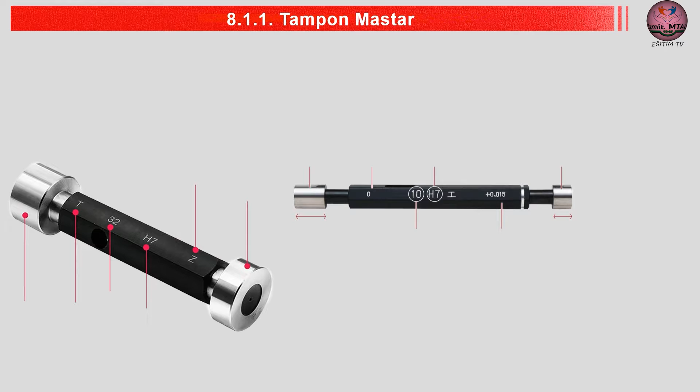Tampon Mastar. Bu mastarlarla deliklerin imalat teknik resminde verilen toleranslar içerisinde yapılıp yapılmadığı kontrol edilir. Çeşitli çap ve boylarda ihtiyaç duyulan ve uluslararası standartlarla belirlenmiş olan ölçü aralığında yapılırlar. Mastarın bir tarafı geçer, diğer tarafı ise geçmez ölçüdedir.

Çap, geçer. Tolerans, geçer yüzey. Geçmez yüzey. Geçer, kalın, geçer tolerans. Tolerans, çap, geçmez tolerans, geçmez, ince.

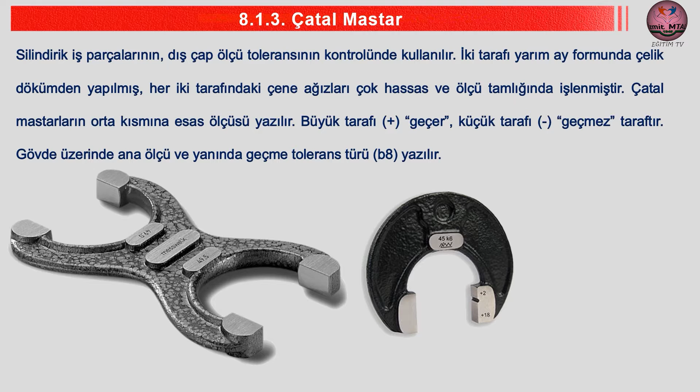Çatal Mastar. Silindirik iş parçalarının dış çap ölçü toleransının kontrolünde kullanılır. İki tarafı yarım ay formunda çelik dökümden yapılmış, her iki tarafındaki çene ağızları çok hassas ve ölçü tamlığında işlenmiştir. Çatal mastarların orta kısmına esas ölçüsü yazılır. Büyük tarafı geçer, küçük tarafı geçmez taraftır. Gövde üzerinde ana ölçü ve yanında geçme tolerans türü yazılır.

Johnson, Blok, Mastarı. Dikdörtgen prizma biçiminde, çeşitli ölçü ve tamlık derecelerinde üretilmiş, yüzeyleri sertleştirilmiş ve hassas şekilde işlenmiş çelik parçalardan oluşan mastarlardır. Mastarların karşılıklı iki yüzeyi çok hassas olması nedeniyle, istenilen toplam ölçüyü meydana getirmek için birleştirildiklerinde, yüzeyler arasına hava girmediğinden mastarlar birbirine yapışabilmektedir.

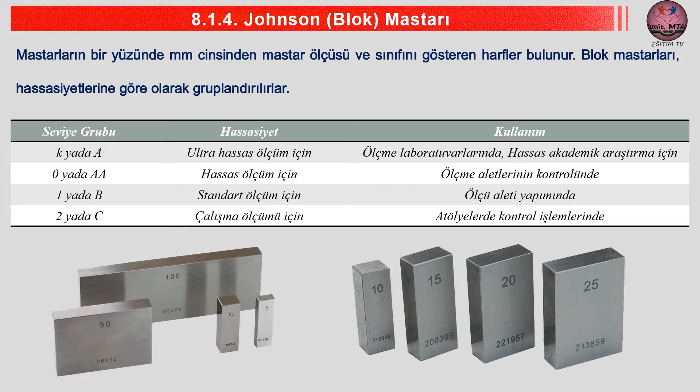Mastarların bir yüzünde milimetre cinsinden mastar ölçüsü ve sınıfını gösteren harfler bulunur. Blok mastarları, hassasiyetlerine göre gruplandırılırlar. Kullanılan blok mastarların yüzey aşınması nedeniyle zaman içerisinde hassasiyetlerinde azalma olur. Bu nedenle hassasiyeti azalan mastarlar bir alt gruba alınarak kullanılabilir.

Mastar takımları parça sayısına göre değişir. Takımlar genellikle 18, 32, 47, 56, 76, 87, 103, 111 ve 128 parçalı olarak imal edilir. En küçük mastar ölçüsü 1,005 mm, en büyük ölçüsü ise 100 mm'dir. İstenilen ölçü mastarlar birbirine eklenerek elde edilir.

Precision starts here. Repeatable, accurate, traceable precision. Of the hundreds of inspection tools available to us, gauge blocks are special. Now, they don't appear to do much. They just sit there with no electronics, no gears, no moving parts at all.

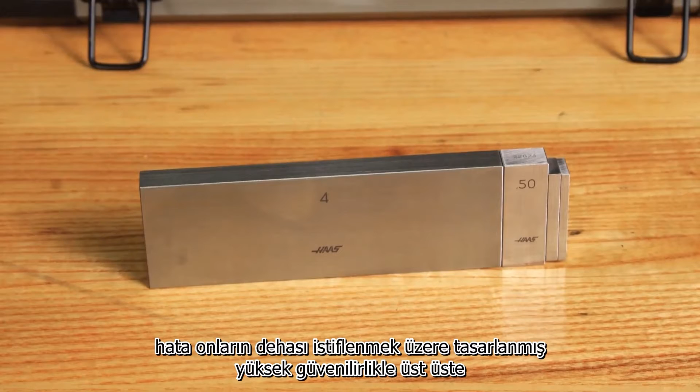But this isn't a fault, it's their genius. Designed to be stacked one on top of another with high reliability and precision, they're the final say in accuracy when used to measure our parts or calibrate other inspection tools.

Pick a number, any number, and we can create a stack of gauge blocks to that height in increments of just 1 micron for our metric sets, or 1/10 of a thou for our inch sets. Placed on a granite surface plate, our gauge blocks can be used as a reference to measure the height of a part or feature with incredible precision.

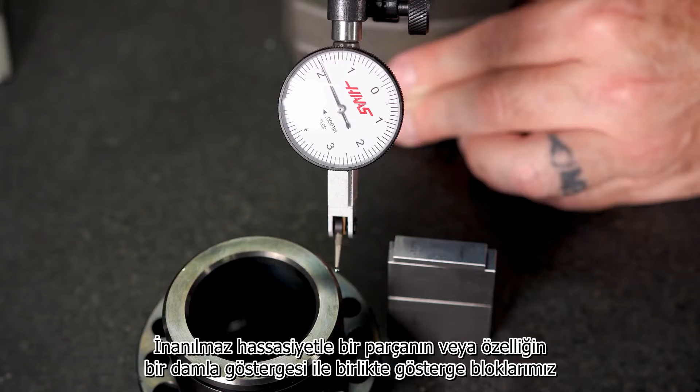Combined with a drop gauge, our gauge blocks can provide the absolute reference values that we need. Now, we will use gauge blocks along with a little trigonometry to produce perfect angles using sine bars or sine plates. With the right accessories, they can be used to create precision gauges for inside diameters, ID features as well, saving us the cost and lead times of custom ring gauges for every job.

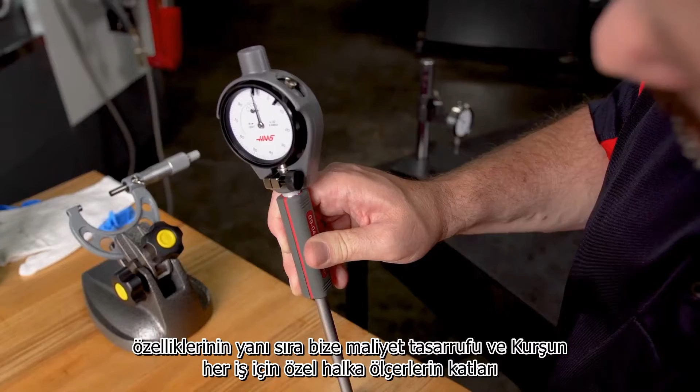Gauge blocks provide that second opinion, the final verdict, when it comes time to verify all of our other adjustable measurement tools. And if you are new to machining, they can be a terrific tool to hone your measurement skills, making sure that we aren't pushing too hard or too lightly with our other hand measurement tools, like calipers.

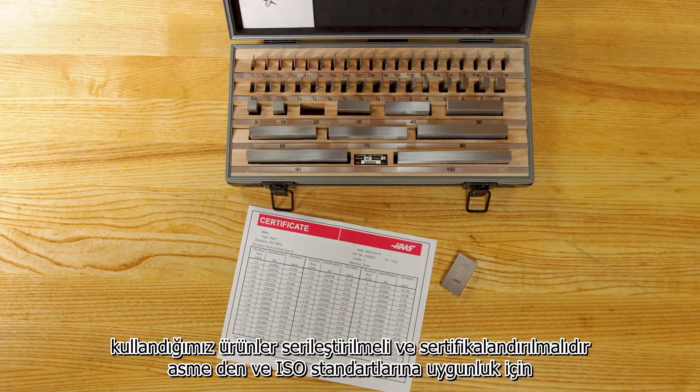A good set of gauge blocks is what connects your shop to the rest of the world, making sure that 1 inch in California is the same as 1 inch in Ohio, making sure that we're all traceable back to the same outside sources. The gauge blocks that we use should be serialized and certified for accuracy to the ASME, DIN, and ISO standards.

Building a stack of blocks is just one of those essential skills that every machinist is expected to master. Now, with a target height in mind, we will start by finding the block that can provide us with our correct least significant digit, our smallest value, that far right decimal value in our height. From there, we will work our way up in size from small to large, right to left, until we've created our desired height stack-up.

We would follow this same roadmap if assembling a stack of metric blocks. Now, we don't just stack our blocks together, we actually wring them together, like wringing our hands. This creates a strong bond that holds them firmly in place. This is an amazing property of physics that is worth looking up sometime.

Now these blocks stick together perfectly, just as expected. But if two blocks don't stick to each other, they might be dirty or damaged. It's that bond between the blocks that let us know that they are clean, flat, and accurate. The mere act of wringing blocks together is kind of an in-process inspection, letting us know that everything is okay.

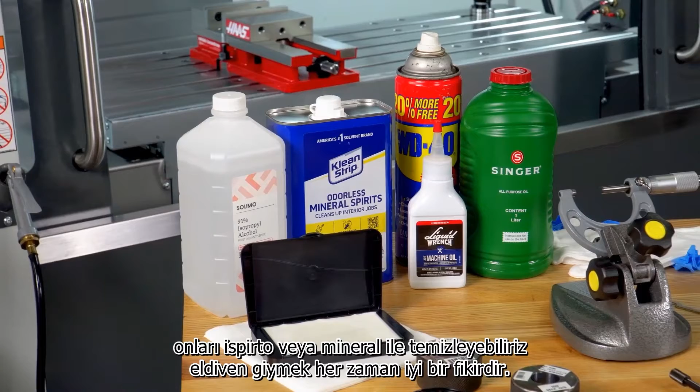If dirty, we can clean them with rubbing alcohol or mineral spirits. It's always a good idea to wear gloves of some sort when handling expensive gauge blocks, but to be honest, I don't often wear them. I'm just too busy measuring parts. But I do take very good care of my gauge blocks, and I've never had a problem because every time I'm done using gauge blocks, I wipe them down, cover them with a light oil, wipe that oil off, and place them back in their protective boxes after each use.

While we need to respect our gauge blocks, they're not fragile. They've been hardened to 63 Rockwell or better, so you're not going to wear them out by cleaning them. Not something you have to worry about.

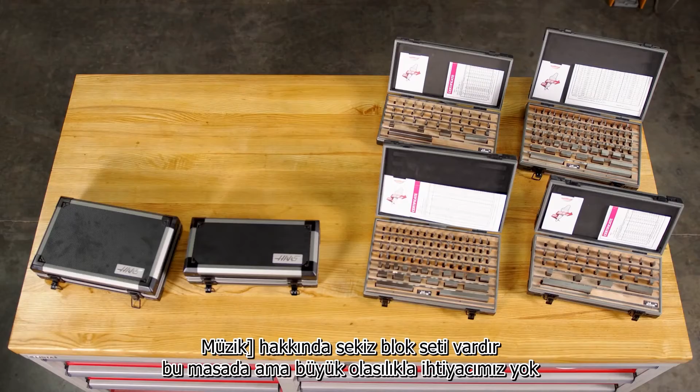There are 8 sets of blocks on this table, but we most likely don't need 8 sets of gauge blocks, so we've got some choices to make. These 4 are all in metric, different grades, different number of pieces per set. These 4 boxes are all in inch. So right now, for the sake of argument, let's just say that we need an inch set of gauge blocks. And then there were 4.

Now these can be split up into 2 discrete groups. There's different grades, different levels of accuracy. We have an AS1 grade and an AS0 grade. The choice we make here is just about how much accuracy you actually need. We can expect from most gauge blocks in a set to be accurate within plus or minus 8 millionths of an inch for each and every one of these gauge blocks, while a grade 0 set might be accurate within plus or minus 5 millionths of an inch.

For our metric sets, which we're not looking at the moment, we might be plus or minus 0.12 micron for a grade 0 set, or plus or minus 0.2 micron for a grade 1 set. This is incredibly accurate. Now, I would use a grade AS1 if I was going to be comparatively measuring parts on the shop floor on a daily basis. If I wanted to go further than that with more accuracy, I would go with a grade 0 set that can be used to calibrate other tools.

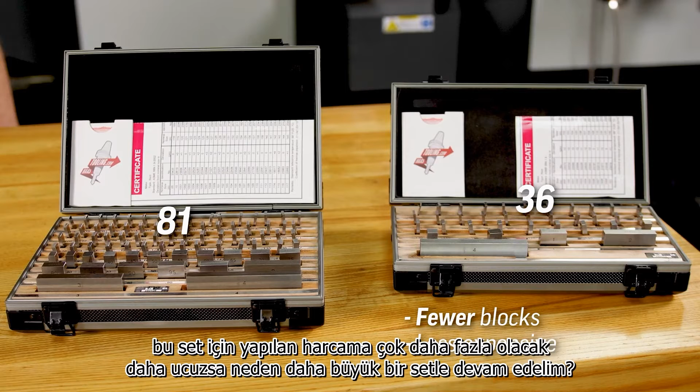But this one's going to use half as many blocks to get there, which means the price, the expense for this set is going to be much cheaper. So why go with a larger set? Here, check out this side-by-side example. Both stacks are built to 3.7889 inches tall. The one on your left is from the 81-piece set, the one on your right from the 36.

With more available block choices, we can typically create most stacks with only 4 blocks using the 81-piece set, while building from the smaller set offers fewer choices and might require 5, 6, or 7 blocks in many cases. Fewer blocks in our stacks means less setup time and a slightly smaller stack up error.

So what does all this mean? What would I go with? Well, for an inspection room setting, I would definitely go with the higher grade and the larger set. There's going to be a small difference in stack up error, but it's actually going to take fewer blocks to get to that stack up each time, which will save you the amount of math you're doing all day long. Larger sets, higher accuracy for your inspection rooms.

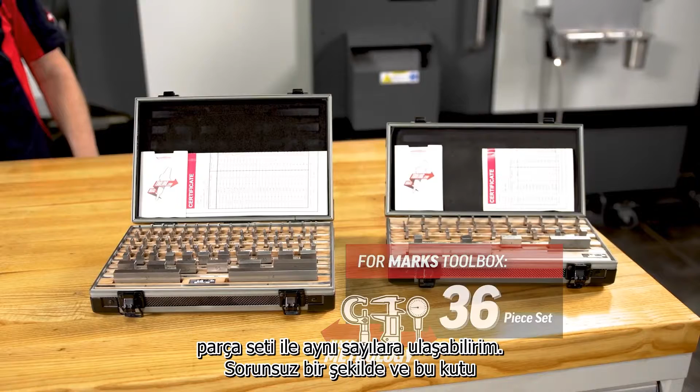Now, for my personal toolbox, I'm probably going to go with the smaller set, like this 36-piece set. I can get to the exact same numbers without a problem, and this box is going to cost me a lot less money, and it's going to take up a lot less space in my toolbox. Well, hopefully this information has made choosing which gauge blocks are best for you a little bit easier.

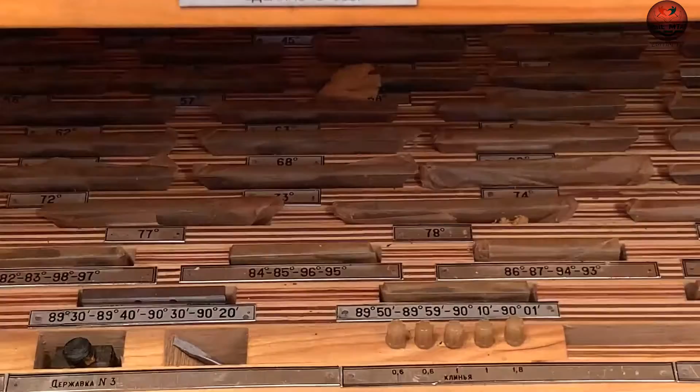Most of the set is never being used. This one I can show you, for example. This one, without oil paper, the other ones are all packed like this, and it looks like they were never outside of this oil paper.

This one is without oil paper, the 60 degrees. There's some grease, some dirt on it, but the condition looks fantastic.

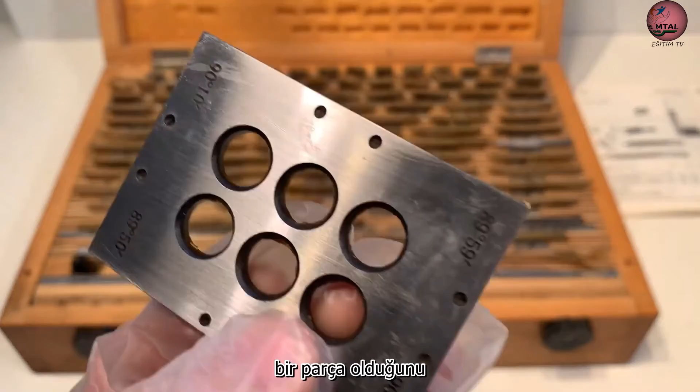The set I think is complete. The only thing I discovered here is that there's one piece that's double, which means there's also one piece missing.

To be more precise, this one and this one are the same, and the one which is not there is the one with these numbers. I can show it from close.

In here are some tools, probably to combine the blocks. And here are some pins with angle.

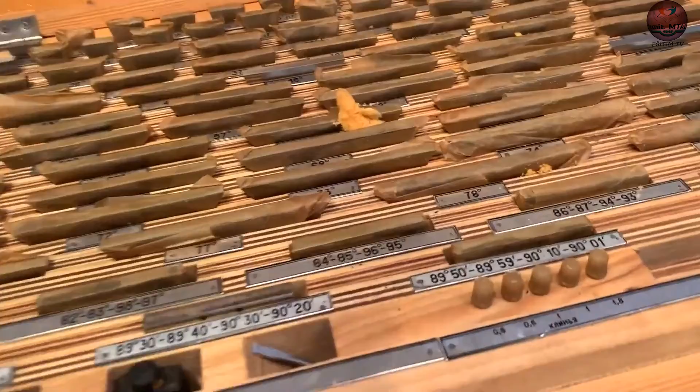Maybe I can show all the different sizes which are available in the set. So here it starts at - this one is dirty with grease.

15 degrees and 1 minute. 15 degrees and 2 minutes. Then it goes up to 20, then from 30, 40 and 50 minutes. And then it starts here with 10 degrees, 11, 12. All the time with 1 degree steps, it goes up.

Let's see, all the way to here, the last one, 79 degrees, and then it goes to 80 degrees here on a square block. 81, 82, 83. So all sizes are here.

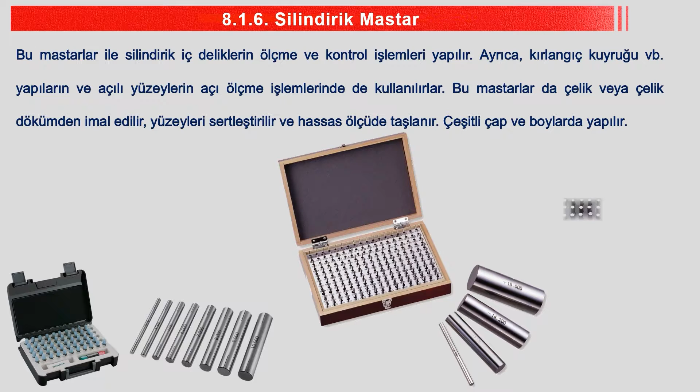Hi everyone. Today I'd like to talk about gauge pins. These are used for measuring small holes as well as gauging whether you are or are not in tolerance. You can also use them for setting a micrometer to make sure it's reading correctly on the dimension you want.

Gauge pins are generally sold in sets. This one goes from 61 thousandths of an inch up to 250 thousandths of an inch by thousandths of an inch. They have a smaller set that goes from 11 thousandths up to 60 thousandths, and a larger set that goes from 251 thousandths up to half an inch. After that, most people and shops would buy gauge pins individually because the sets are prohibitively expensive.

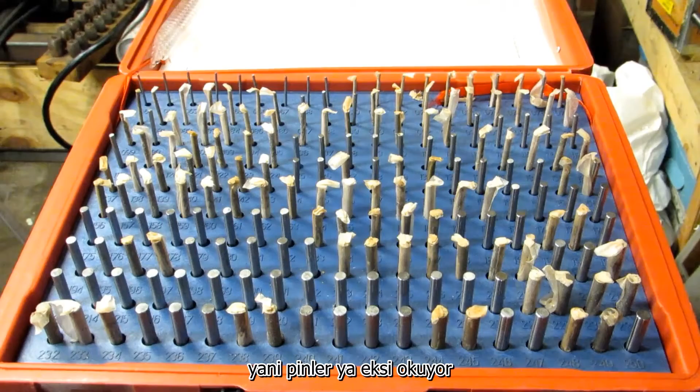They also sell these as minus and plus sets, meaning the pins either read minus 0.2 of a thousandth or plus 0.2 of a thousandth. I find the minus set works better for what I do, which is mostly measuring small holes. The minus 0.2 allows me to slip it into a hole that is exactly the size of that pin.

The pins are all marked with the size, so hopefully you can see this on camera - it says right there, laser marked, that this is the 250 thousandths minus pin. Obviously, if this was the plus set, it would say 250 plus. And yes, even the 61 thousandths pin has the size marked on it, but I'm sure you're not going to be able to see that on camera.

If you have a small hole like this, you can't really rely on calipers because the inside jaws on a caliper are kind of flat on the side. I've talked about this in one of my other videos, the 4 different ways of measuring with calipers. So generally, especially on holes smaller than an inch or so, caliper measurements are incredibly unreliable when using those internal jaws, just because they tend to measure smaller than you actually have.

When you're measuring a small hole with it, you would grab a pin that's roughly the right size. So I'm going to grab, this is 215. You would put that in there, and you know that's not the right size because you can wiggle it around in there - it's quite loose. So then you can go up to maybe 220. Okay, well that's closer, but it still fits in there.

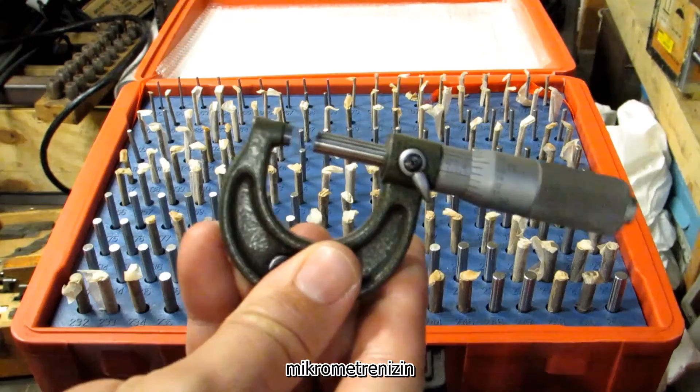Another use for these would be to make sure that your micrometer reads the correct amount at the dimension you're shooting for. So if I were shooting for 250 thousandths, I could grab my 250 thousandths pin and make sure that my micrometer reads the correct amount. There's some wear that could happen over the travel of the micrometer, so it's really good for tight tolerance work.

Now you do have to keep in mind that this is a minus pin set, so my micrometer reading should actually be 249 and 8/10, and it is right on the money. So my micrometer is good to measure for whatever 250 thousandths dimensions I might have.

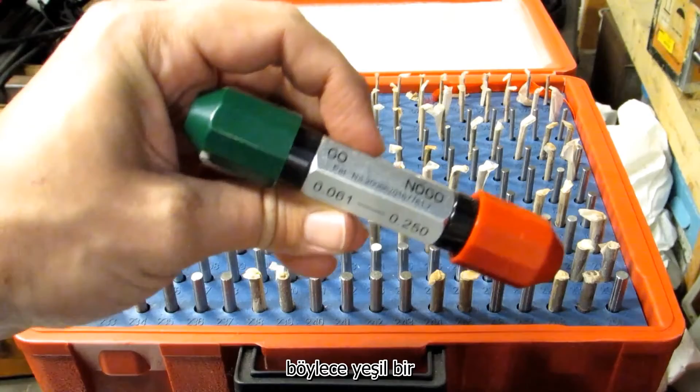The name gauge pin comes from its use in what are called go, no-go gauges. You can buy handles like this. You can see you've got a green side and a red side, labeled go and no-go. This handle actually works for the entirety of the range of this set, from 61 thousandths all the way up to 250 thousandths.

So in use as go, no-go gauges, let's say your hole tolerance was from 220 thousandths up to 225 thousandths. Well, you can grab your 220 pin and put it in the go side. This tightens up just like a drill chuck. And then grab your 225 pin and put that in the no-go spot.

So in this case, we'll go back to our little hole that we had earlier. If the go side fits in, then you should be okay on that end because your hole is obviously bigger than the low end of your tolerance. If your no-go side does not fit, then you should be within your tolerance of your hole. If the no-go side does fit, then you're out of tolerance and your part is scrap.

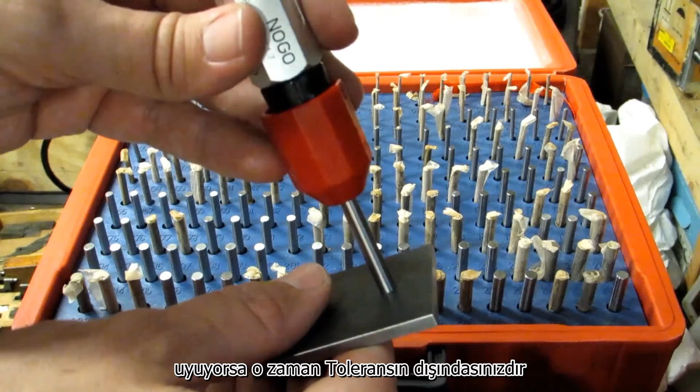One more thing, you can see that I still have quite a few of these still wrapped up in the paper they come wrapped in to prevent rust. I just unwrap them as I need them because they're a bit of a pain to unwrap. Sometimes you can actually unpeel them, but most of the time it just starts shredding. So what I generally do is just grab my fingernail, tear down that way, and you can get it unwrapped pretty fast. Then I would definitely wipe off the anti-rust goo with the solvent of your choice before you put it back in the box.

This set is actually an import set, and I'm not going to spend hundreds or thousands of dollars getting a really high quality set because I don't use them all that often. The other thing about import gauge pin sets and import gauge block sets is if they say they conform to the specifications that they should, then they conform. I've actually measured every single one of these that I've unwrapped, and it does fit the specifications, the -2/10. So I wouldn't be shy about buying an import set. They are a lot cheaper than the American-made sets.

Especially if you're a home shop and you're not doing this as a business, but you need an accurate way to measure holes. Anyway, I hope this helps, and I'll see you next time.

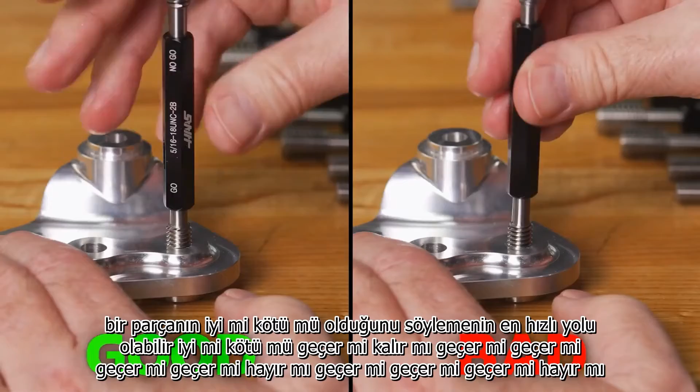Pin gauges, also known as plug gauges or even go, no-go pins. If we want to know what size a hole is, we test fit pins until we find a pin that fits, that is next to a pin that doesn't fit. We now know for certain that our actual hole size is somewhere between these two pin diameters.

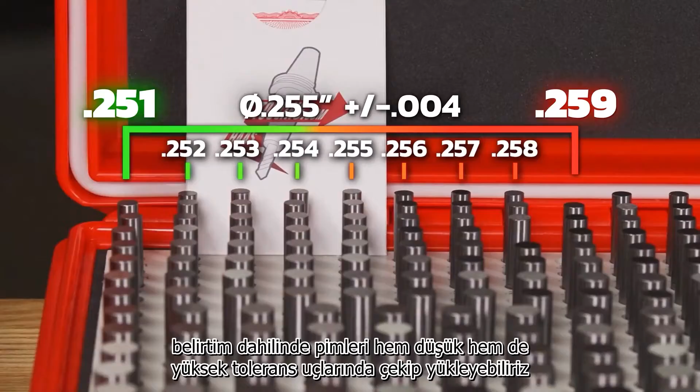Now that's pretty quick, but if we just want to quickly find out if a feature is good or not within spec, we can pull pins at both the low end and the high end of our tolerance and load them into a go, no-go handle. If the go pin fits and the no-go pin does not fit, then we know that we have a good part. Nothing is faster, pass or fail, go or no-go.

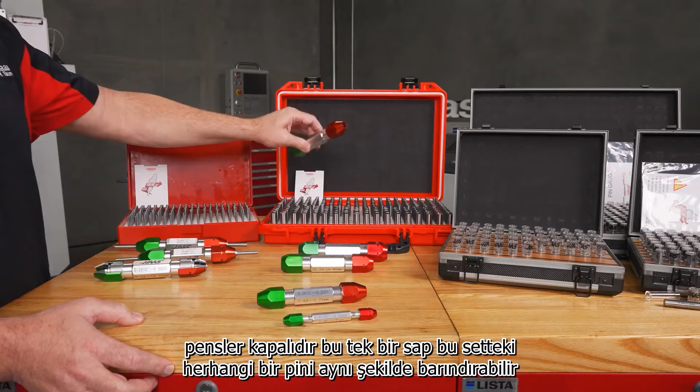Some pin handles make use of actual collets, but they're only good for a few pin sizes. These pin handles are actual pin vices with an enormous range, kind of like little chucks. We can see how the three jaws are held parallel to the pin as the collets are closed. This one handle can accommodate any pin in this whole set. The same is true for this handle and set, and this one.

This might sound like a random fact, but as many as 1 in 10 men are colorblind. This matters when looking at gauge pin handles, because while many of us see the red and green color markings on our go/no-go pin holders, a good number of operators just see this. Find a handle like this one that uses an identification groove as well as colored end caps on top of the go/no-go markings. This style of handle also makes a terrific pin vise for holding deburr tools and countersinks.

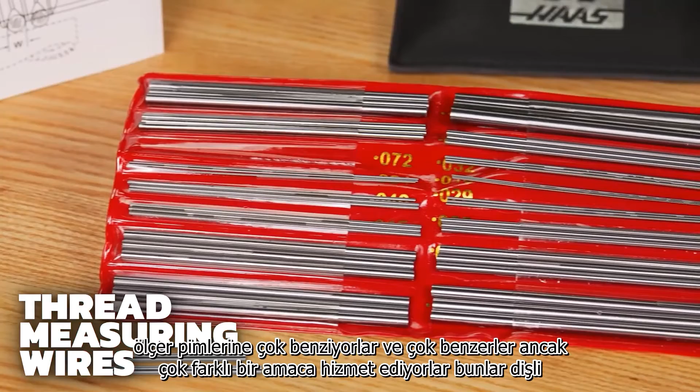This essential machinist tool looks an awful lot like gauge pins, and they're very similar, but they serve a very different purpose. These are thread measuring wires. These pins or wires are precision ground and come in sets of 3. We use them along with a regular set of micrometers to measure the pitch diameters of outside threads. This is a pretty clever feat.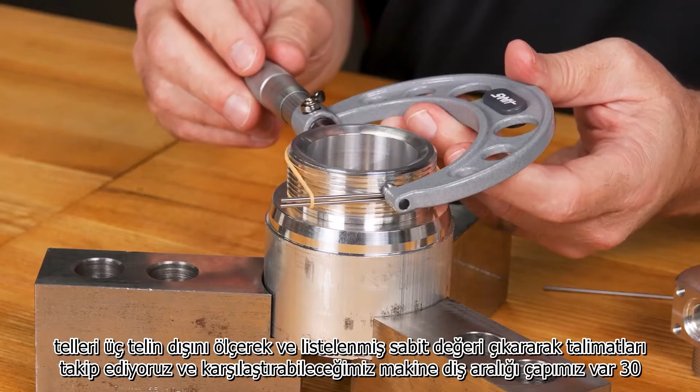We are told which pins to use based on which thread we're trying to measure, and it's all in the little manual that comes with the thread measuring wires. We follow the instructions, measuring on the outside of the 3 wires and subtracting the listed constant value, and we have our machined thread pitch diameter that we can compare to the nominal pitch value found in our machinery's handbook or elsewhere. No heavy math, no trigonometry, simple.

Now if you are cutting threads all day long on a lathe, you need to be looking at a nice set of pitch micrometers. But for the price and simplicity of a set of thread measuring wires, they belong in every machinist's box.

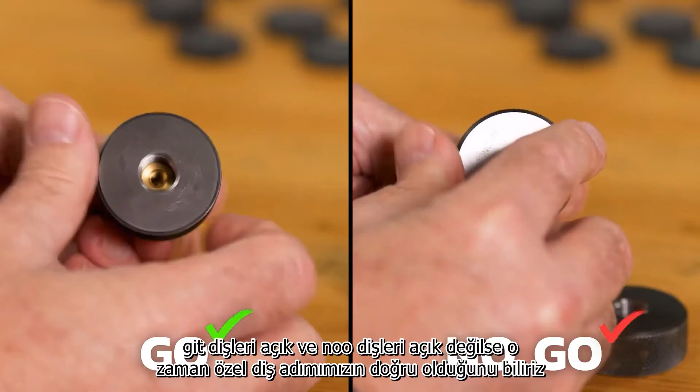These are threaded ring gauges, and we can use them to check if our outside diameter threads are within tolerance. These gauges have been precision ground at the top and bottom of our thread tolerances to work as go and no-go gauges. If the go threads on and the no-go does not, then we know that our specific thread pitch is correct. We will still want to check our thread major diameter with a set of calipers or micrometers. These threaded ring gauges are checking our pitch and our pitch diameter all in one shot. Go/no-go gauges are fast and reliable.

For threaded holes, we can use threaded plug gauges to make sure that all of our internal threaded features are correct. Again, we have a precision ground go side, which should thread in nicely, and a precision ground no-go side, which should not thread in. These gauges are checking our thread pitch, our thread lead, and our pitch diameter all at one time. For a more complete ID thread inspection, we're going to want to check our thread minor diameter as well, which was created with our tap drill, and we can check that using regular gauge pins.

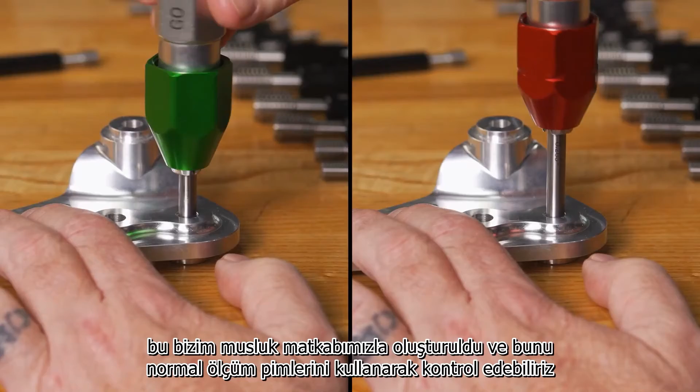Of the hundreds of different inspection tools available to us, gauge blocks are special. Now, they don't appear to do much. They just sit there with no electronics, no gears, no moving parts at all. But this isn't a fault, it's their genius. Designed to be stacked one on top of another with high reliability and precision, they are the final say in accuracy when used to measure our parts or calibrate other inspection tools.

Pick a number, any number, and we can create a stack of gauge blocks to that height in increments of just 1 micron for our metric sets or 1/10 of a thou for our inch sets. Placed on a granite surface plate, our gauge blocks can be used as a reference to measure the height of a part or feature with incredible precision. Combined with a drop gauge, our gauge blocks can provide the absolute reference values that we need. Now, we will use gauge blocks along with a little trigonometry to produce perfect angles using sine bars or sine plates.

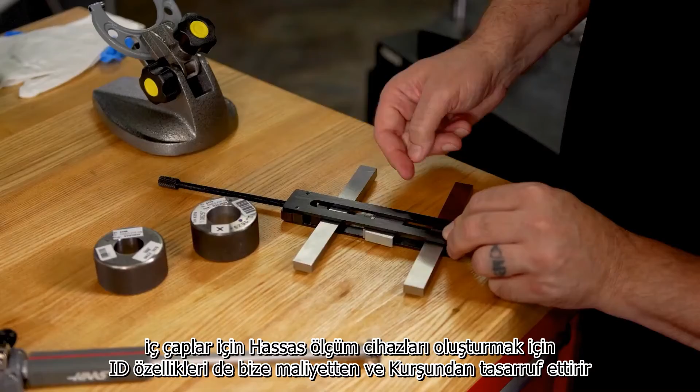Now, we don't just stack our blocks together, we actually wring them together, like wringing our hands. This creates a strong bond that holds them firmly in place. Now, this is an amazing property of physics that is worth looking up sometime. With the right accessories, they can be used to create precision gauges for inside diameters, ID features as well, saving us the cost and lead times of custom ring gauges for every job. Gauge blocks provide that second opinion, the final verdict, when it comes time to verify all of our other adjustable measurement tools.

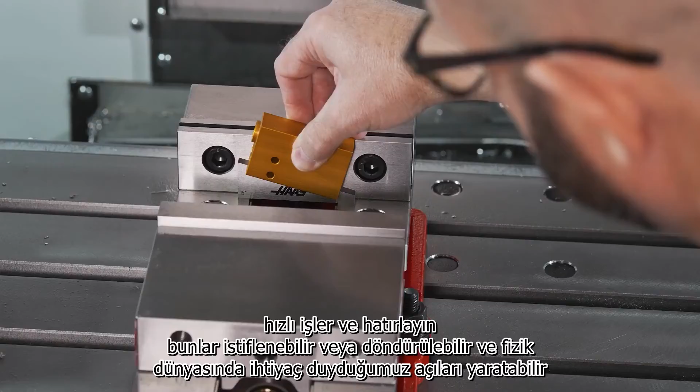For easily setting up or inspecting precision angles, we can use angle blocks, one at a time, or we can stack them to create any angle we'd like. I'll often use them in a vise, avoiding the hassle needed to create angled fixturing for quick jobs. And remember, these can be stacked or rotated to create the angles that we need.

In the world of physics, a simple machine is a basic mechanical device that changes the direction or magnitude of a force, like a lever, wheel and axle, pulley, inclined plane, wedge, or screw. Simple, yes, with few or no moving parts, but absolutely revolutionary, just like our simple gauges. These gauges quite literally set the standard for all of our other inspection tools.

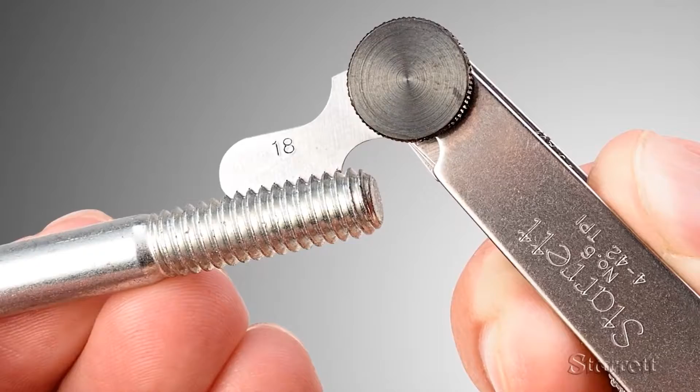It's always good to keep screws organized, but sometimes you need to use one that looks about right but is not identified. You need to find out the screw pitch or threads per inch. This model number 6 screw pitch gauge has 30 leaves ranging from 4 to 42 TPI, or threads per inch. The leaves fold out from each end of a rugged steel case and can be locked in place with a light twist of the knob.

Here you have a screw that you think is the right size, but you need to be sure because you might ruin your workpiece if you strip a thread with the wrong size screw. Finding the pitch of the screw is simple. Hold a leaf that looks about right up against the screw. Oops, that's too big. Let's try a couple of sizes smaller. Nope, too small. Alright, we'll try the one in between. That's it. The screw has a pitch of 18 TPI.

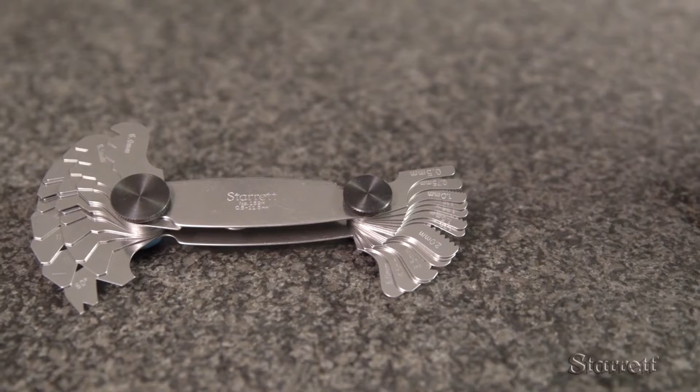Some screws have metric threads. For that, we have a similar gauge, the 159M, which has 28 leaves to identify threads from 0.5 to 11.5 millimeters. Here, we are using the 159M to verify that our mystery metric screw has a pitch of 2.0 millimeters, just as we expected. It's always good to be right the first time.

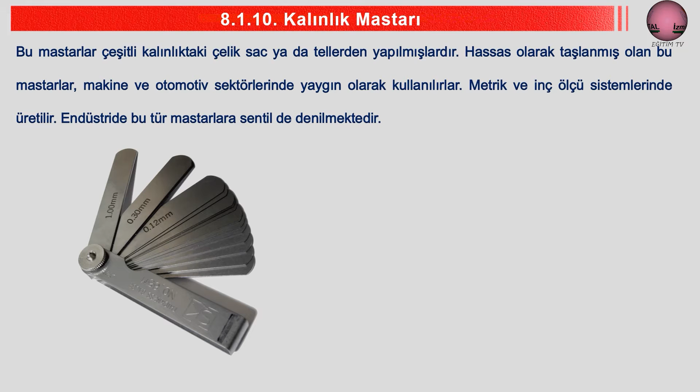We're going to measure the amount of movement on this gear right here. It's actually fifth gear. But if you look at this, you will see that it has a little bit of wiggle back and forth. And that clearance is way down in here. So we can see that a little bit better now that I've zoomed in. Right down in there, and we can see that movement.

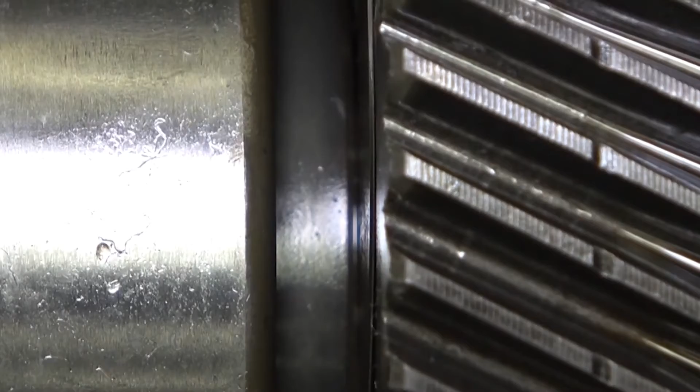The feeler gauge is going to go right down in here like this, and it's going to slide down in between those two components. So I'm going to use the feeler gauge and slide it back and forth, looking for that exact feel. And I'm going to check the size of this. The size of this is an 11 thousandths of an inch. So the next step would be to try a 12 thousandths of an inch and see if that enters as well.

So there's my 12, and we'll go ahead and see if that can fit in there as well. And that one goes in as well. So just keep increasing the size of your feeler gauge until you find one that doesn't go in. So I would move to a 13 and so forth.

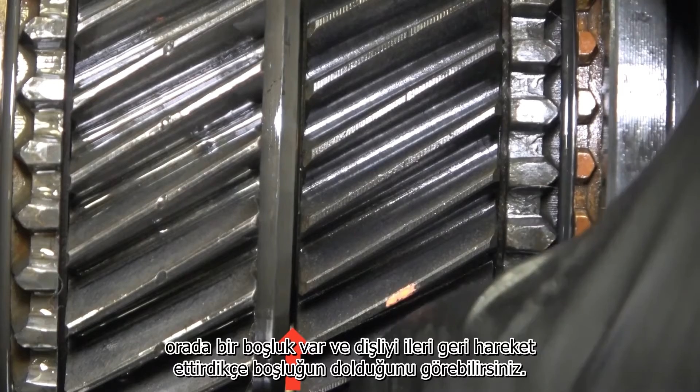So this is third gear, and it has similar back and forth movement. This is called thrust or axial movement, and that can be measured. Once again, we're going to start off with a feeler gauge, and get down where that clearance is going to be measured between those two gears. So there's that gap, and as I move the gear back and forth, you can see the gap being taken up.

So that feeler gauge is going to fit right down inside there like this, and it's going to slide in there. And we're going to keep increasing that feeler gauge size until we find the size that doesn't fit in. So that's our go, no go. And this happened to be that 12 thousandths.

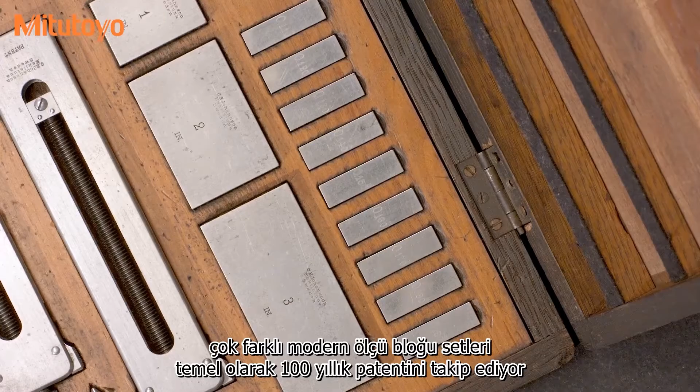We have here an actual set of Johansson blocks that one of my colleagues at Mitutoyo America collected. You can see the Johansson name and Sweden marked on the gauge blocks. The sets we sell today don't look much different. Modern gauge block sets basically follow his 100-year-old patent.

During World War I, the US government became worried about the supply of gauge blocks to the United States from Sweden. Along came a Mr. W.E. Hoke, who developed his own way to make gauge blocks around 1917. He made them square with a hole in the middle to make them easier for him to lap flat. The square gauge block with the hole in the middle was derived from Hoke's design.

Still today, you can buy gauge blocks in either Johansson's rectangular design or in Hoke's square design. Rectangular blocks are much more common, but some people like the square blocks. In other episodes of the Metrology Training Lab, you will see us picking either rectangular or square blocks for various tasks. For the interested viewer, Mitutoyo has published a little book on the history of gauge blocks. You can download that for free from our on-demand educational resources on our website.

Modern gauge blocks come rectangular or square in inch or millimeter sizes. The typical set includes lengths up to 4 inches, but you can get long block sets up to 20 inches. And you can special order gauge blocks up to 40 inches or 1 meter long.

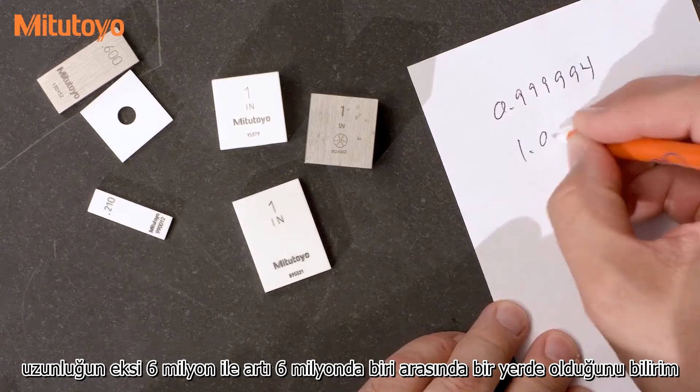For example, these three 1-inch gauge blocks, if they're all grade 0, according to the tolerances in the standard, it would be plus or minus 6 millionths of an inch. If this gauge block, or all three of these gauge blocks, have been properly calibrated and found to be in tolerance, then I would know that the length is somewhere between the minus 6 millionths and the plus 6 millionths of an inch.

I told you these things were accurate. If this was instead, say, a grade AS2 gauge block, the tolerance should go from 6 millionths of an inch up to 24 millionths of an inch.

Gauge block grades are defined in national and international standards. In the US, we use the American National Standard for Gauge Blocks, ASME B89.1.9. You can also find the tolerance table in the Mitutoyo catalog. All manufacturers of gauge blocks sell them in grades in accordance to the standards. You should select gauge blocks based on your accuracy needs. In a calibration lab, grade 0 gauge blocks are quite common.

So, that's a brief introduction to gauge blocks. How do we use them? Gauge block faces are very flat and very smooth. The reason for this is that allows gauge blocks to ring together.

Without using any adhesive, gauge blocks can be brought together and the flat, smooth surfaces will adhere to each other without causing any damage. When done properly, the gap between the two gauge blocks is somewhere around 1 millionth of an inch. And when you're done, they can be broken apart and reused over and over.

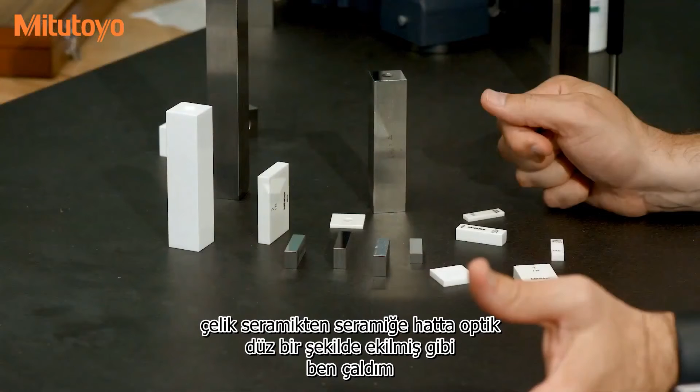And any flat or smooth surface will ring together: steel to steel, ceramic to ceramic, even an optical flat, such as shown here. I've rung together 3 different gauge blocks: rectangular, steel, ceramic, and an optical flat. All 4 of those blocks are rung together nice and tight.

That's pretty neat. The idea behind Johansson's original patent was the particular sizes in a set of gauge blocks. They allow you to build an accurate stack of gauge blocks to create any length you need.

So let's walk through the ringing process. When you ring blocks, you apply quite a bit of force. To avoid scratching your blocks, it's important they are clean. It's important, particularly for steel blocks, to also make sure there's no raised edge or burr or some sort of ding.

First, I'll use some denatured alcohol to clean the block. And then I'll use this Mitutoyo Cerastone to remove any burrs. This is sometimes called conditioning the block. We're not changing the length of the block, we're just removing any high spots, particularly on the edges.

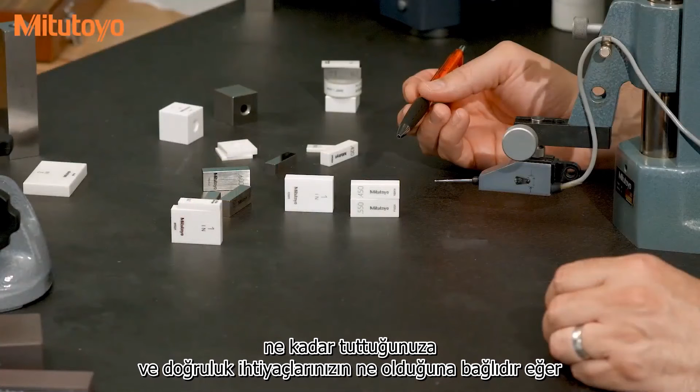If you want to see how well you can ring, a fun and easy test is to ring two blocks together that add up to the value of a third. Say this 450 and 550 block, which add up to 1 inch, and we compare it to a 1 inch block. So we ring these two blocks together, and then using something like a high accuracy detector like this mu checker, I can then compare the rung block stack to the single block. Now this test is not super accurate, but it should be good enough to see if your ringing skills are good enough to, say, calibrate a micrometer.

Our last topic on gauge blocks is their calibration. In our calibration lab here at Mitutoyo America, we use really cool automated gauge block comparators. But we have a manual version here in the metrology training lab. So let's head over there and I'll discuss some important topics on calibration.

Gauge blocks are usually calibrated using a comparison method. This is the master block and this is the customer block to be calibrated. We set the comparator using the master block, and then measure the customer block.

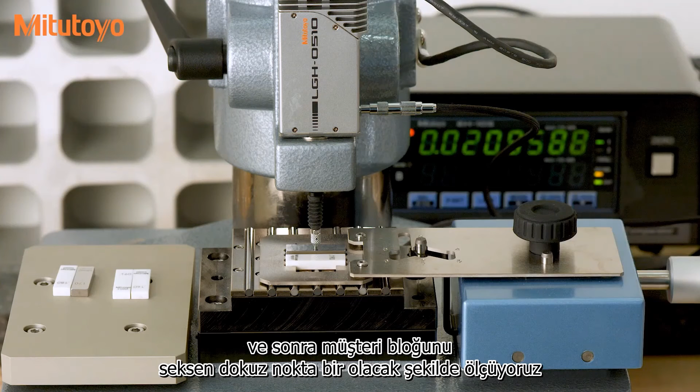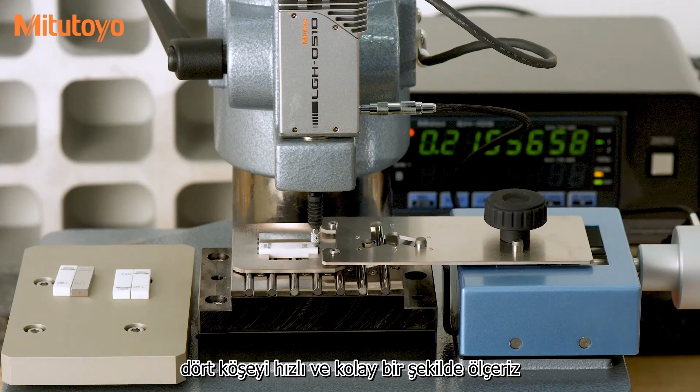In accordance to B89.1.9, the length tolerance for gauge blocks applies across the entire surface of the gauge block, not just at that gauge point. The standard discusses the importance of checking the size in addition to the gauge point at all four corners. This fixture here moves the gauge block around such that we can measure the four corners quickly and easily. In order to state conformance to grade, in accordance to the ASME B89.1.9 standard, all 5 of these points must be in tolerance.

Gauge block calibration practice in the United States is sometimes a bit sloppy. To save calibration costs, some people have been convinced to go with a single point calibration, where the corners are not checked at all. The only time that's acceptable is when you're only using the gauge block at that exact measurement point, and I think that's pretty rare. Please be careful with exposing yourself to calibration risks just to save a few dollars. If you just need a cert to show some auditor, well, that's your business. But if you really care about quality, do the calibration right.